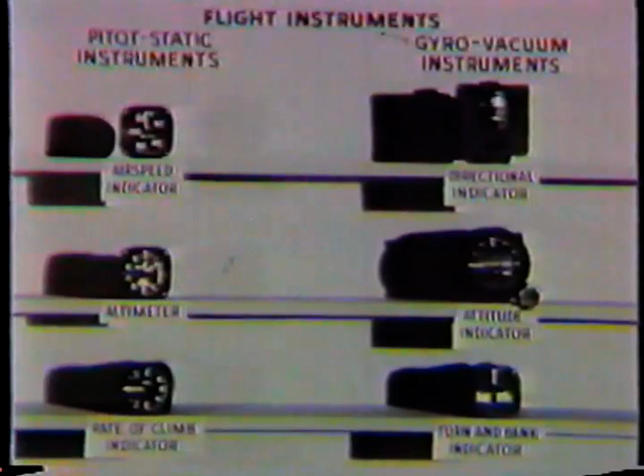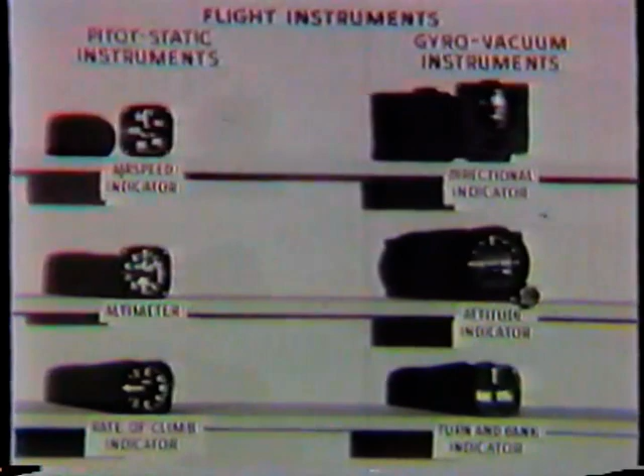These 6 instruments are the ones normally found in Army aircraft. They're used in fixed-wing aircraft as well as many helicopters. The 6 instruments are divided into 2 groups: the pitot-static instruments and the gyro-vacuum instruments. These 2 names, as we shall see, come from the method of operation of the instruments.

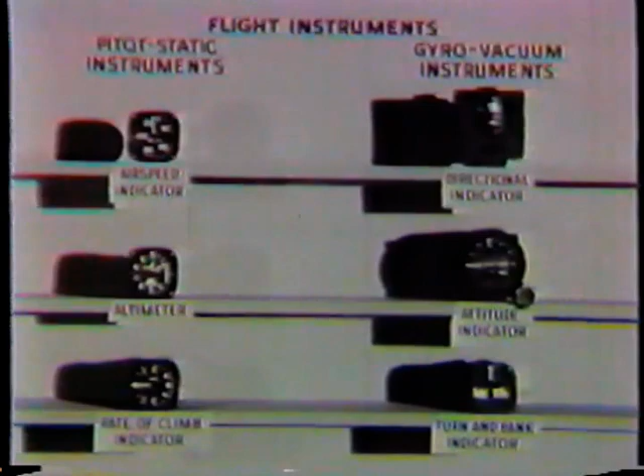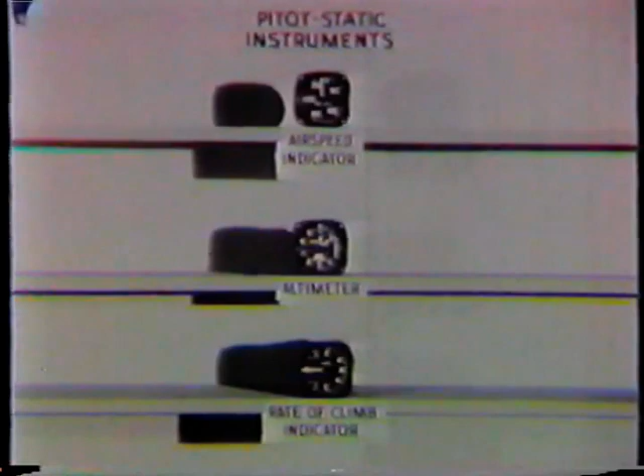The pitot-static instruments are air-operated. 2 kinds of air pressure are required: pitot pressure and static pressure. What is pitot pressure? How is it obtained? Pitot pressure is obtained from a pitot tube, a simple device named for its inventor, Henri Pitot, a Frenchman.

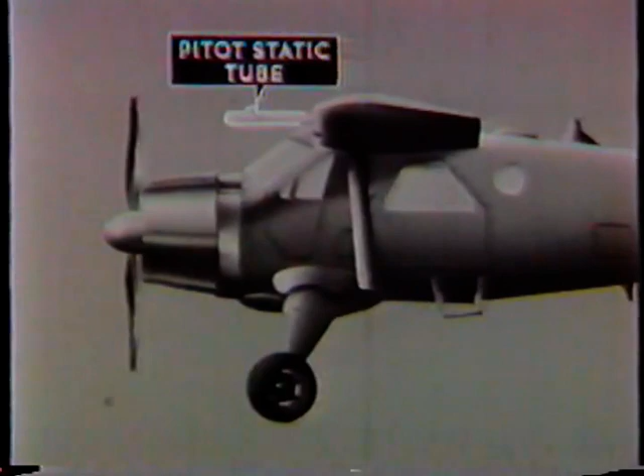The pitot-static tube is usually located in the leading edge of the left wing. The pitot tube is pointed in the direction of flight. It collects the air, which is rammed into this opening at the nose of the tube. The amount of air rammed in depends on how fast the aircraft is moving. To give a true reading, the pitot-static tube must always be located where the flow of air is least disturbed.

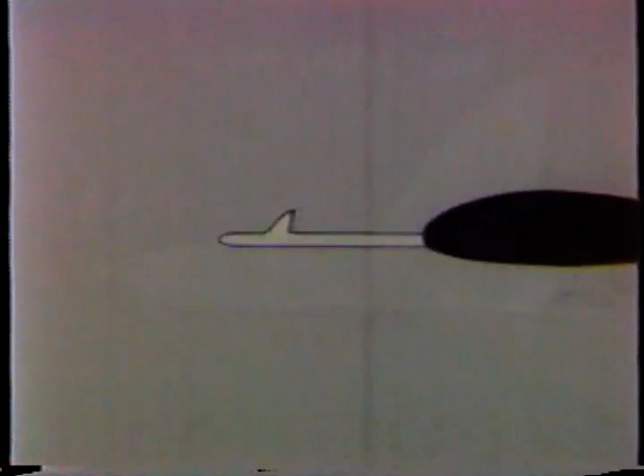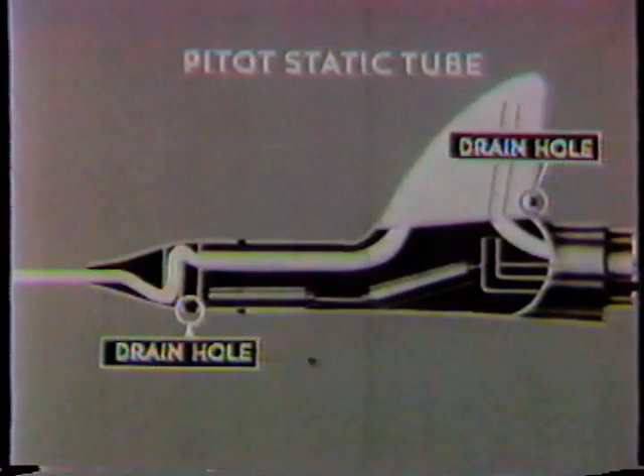Let's take a closer look at the pitot-static tube and see how it operates. Inside the pitot tube, there are baffles in the air passage. They break up the flow of air and help extract dirt and moisture from it. The dirt and moisture are drained from the tube through drain holes. To prevent the moisture from freezing and blocking the tube, heaters are provided. They're controlled by a switch in the cockpit.

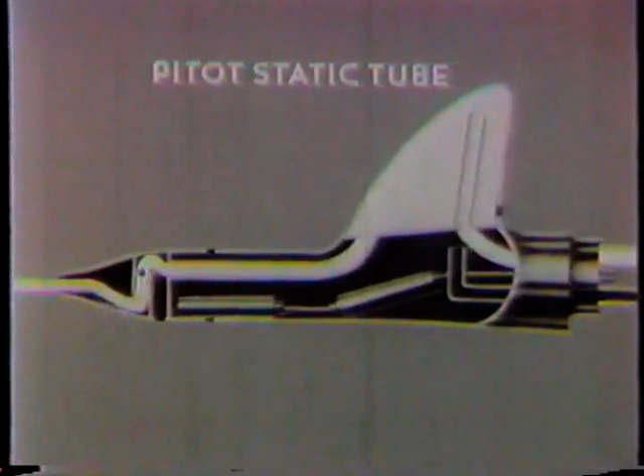From the pitot-static tube, the air is carried through metal tubing to the airspeed indicator. So far, we've learned that pitot pressure is ram air, or air under pressure, corresponding to the speed of the aircraft moving through the air.

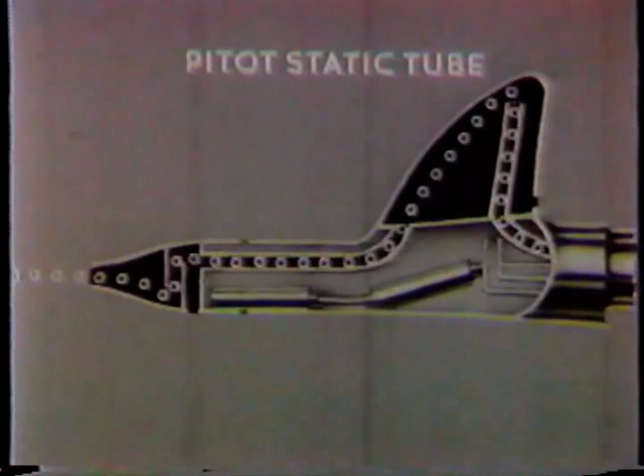What is static pressure? How is it obtained? Static pressure enters the tube through holes in the top and bottom. Since the static holes are at right angles to airflow, air is not forced or rammed in. Static pressure is ordinary atmospheric air pressure. It does not vary with the speed of the aircraft.

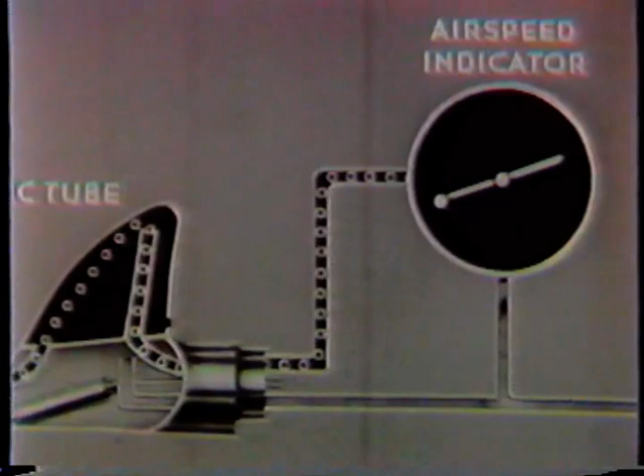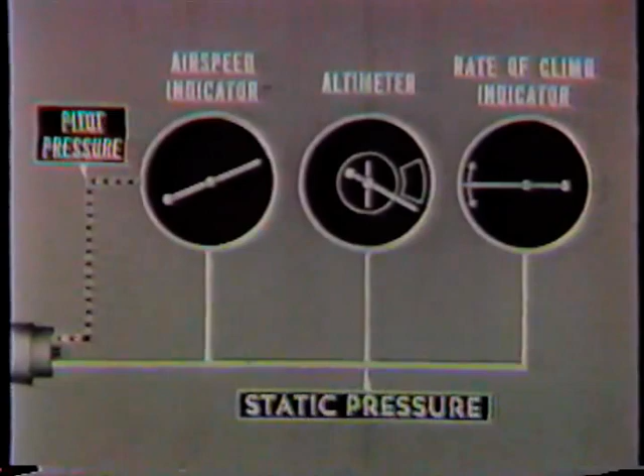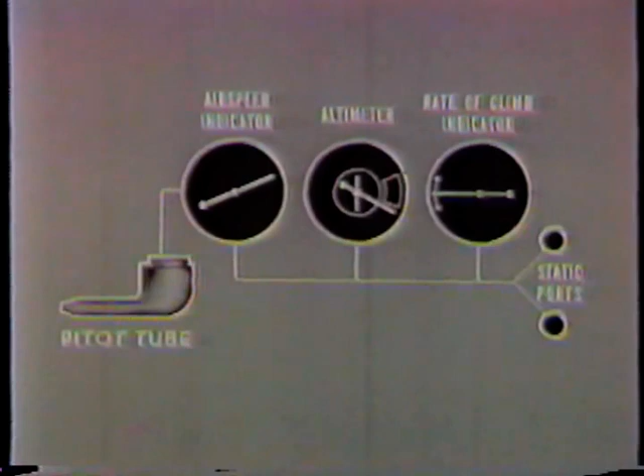As we know, pitot pressure is used only in the airspeed indicator. But static pressure is used in all 3 of the pitot-static instruments. There is another means of obtaining static pressure, which is commonly used on Army aircraft. A pitot tube, rather than a combination pitot-static tube, is used. Static pressure for the instruments is obtained through tubing running to static ports on the fuselage of the aircraft.

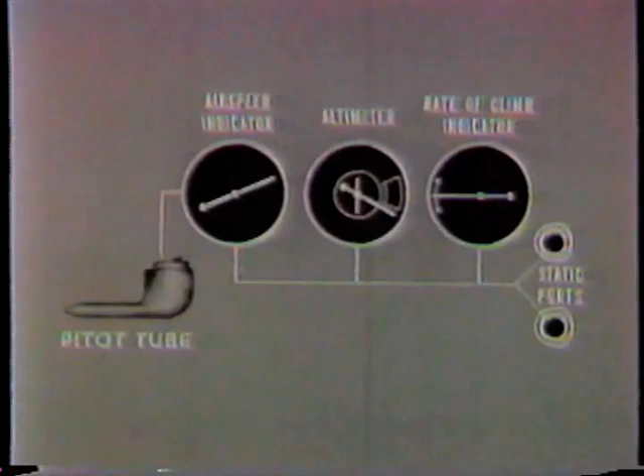On the actual aircraft, the static ports are located where air will not be forced into them. A grid with small holes covers the port to help prevent small objects like bugs or dirt from entering. Be careful not to plug these holes when you're cleaning or waxing an aircraft.

Now we know that pitot pressure is air forced into the system by movement of the aircraft through the air, and static pressure is air at atmospheric pressure. Later we'll see that atmospheric or static pressure also varies during the course of a flight.

There are 3 pitot-static instruments commonly used in Army aircraft. First, we will examine the airspeed indicator and learn about its working principle. The airspeed indicator is housed in an airtight case.

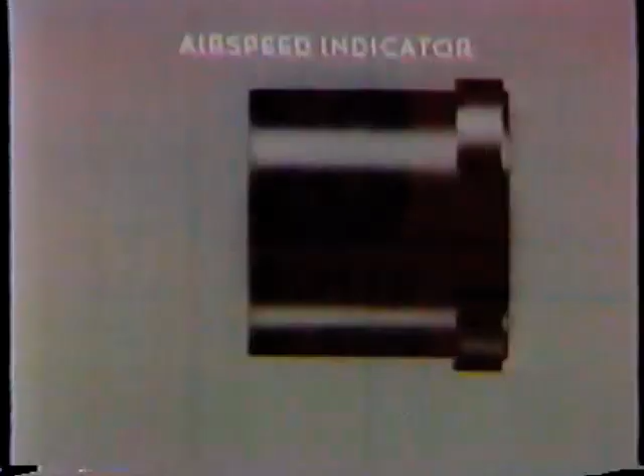As we learned earlier, both pitot and static pressure are used. The static pressure line simply attaches to the case so that the interior of the case is vented to the outside atmosphere. The pitot line enters the case where it terminates in a hollow, flexible diaphragm.

Let's take a closer look at the diaphragm. By cutting away a section, we can see that it is made of 2 thin metal dish shapes joined at their edges.

The corrugations on the walls make the diaphragm quite flexible. As the aircraft moves, pitot air is forced into the diaphragm, causing it to expand in size. As the aircraft increases or decreases its speed, the diaphragm expands or contracts.

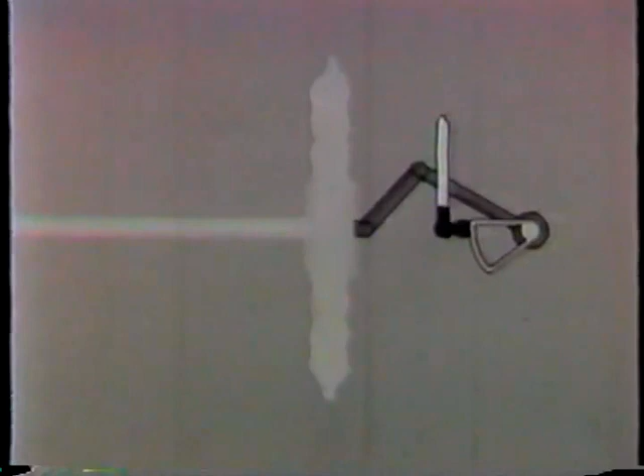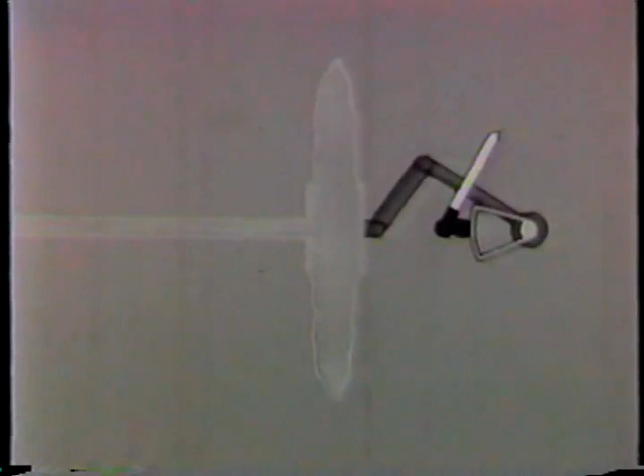This movement is transmitted to a mechanical linkage consisting of gears and levers. Here we see a simplified version of this linkage. When the airspeed is increased, the diaphragm expands, moving the linkage, which in turn moves the pointer to indicate the increase in airspeed. As it contracts, a lower speed is indicated.

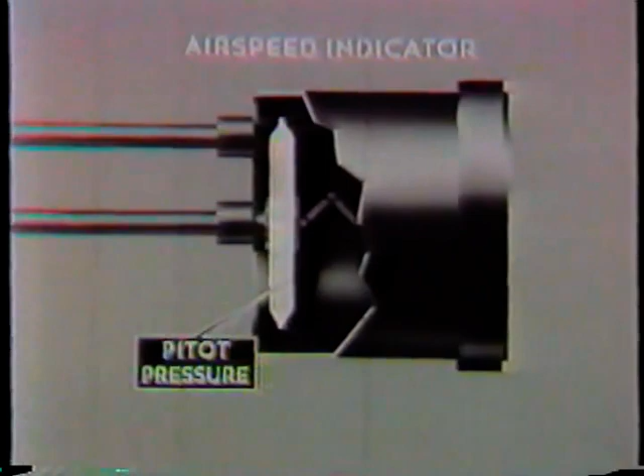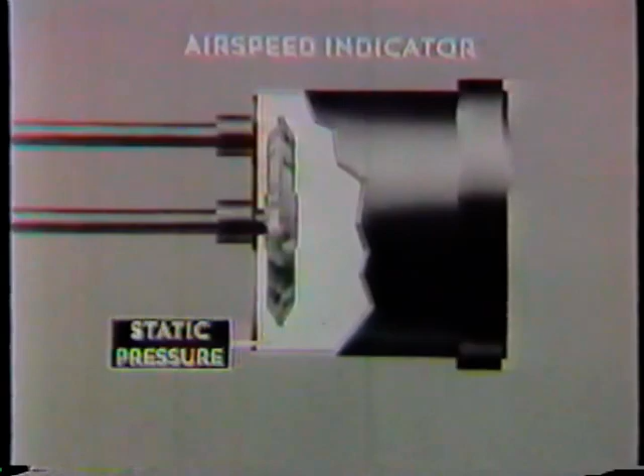Actually, since there is pitot pressure in the diaphragm and static pressure in the sealed case, we can say that airspeed is measured by comparing the difference between pitot pressure and static pressure. The airspeed indicator uses both pitot and static pressure.

But the altimeter and rate of climb indicator use only static pressure. Before we can study the working principles of these instruments, we must know why static pressure varies during the course of a flight.

First, let's clear up our terms. Static pressure is the same as atmospheric pressure or barometric pressure. All 3 mean the same thing, the pressure exerted by the air making up the Earth's atmosphere. Why does air exert pressure? The answer is simple. Air has weight.

Supposing that the Earth at sea level is divided into many square inches. Let us take one of these square inches as an example. Resting upon this square inch, imagine 1 cubic inch of air which weighs very little. But take a column of air extending upward to the limits of our atmosphere. This column exerts a pressure of 14.7 pounds. This is what is meant by the statement, standard atmospheric pressure is 14.7 pounds per square inch at sea level.

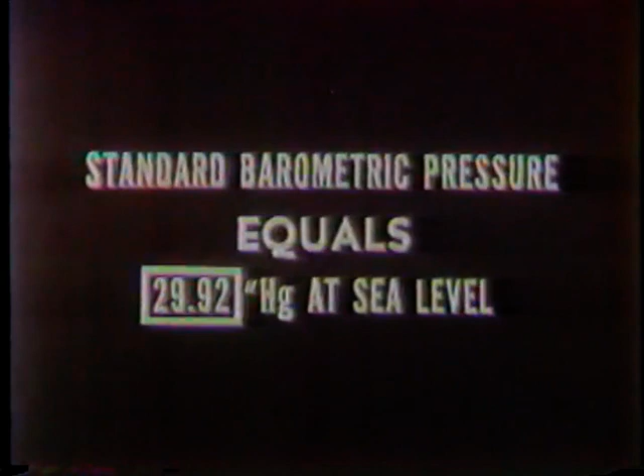Therefore, atmospheric pressure decreases the higher you go. You may also refer to static pressure like this. Standard barometric pressure is 29.92 inches of mercury at sea level. Hg is the chemical symbol for mercury. When atmospheric pressure is stated in inches of mercury, the reading is always a barometric measurement. The reason for using the term inches of mercury is because the first barometer invented used mercury as an indicator.

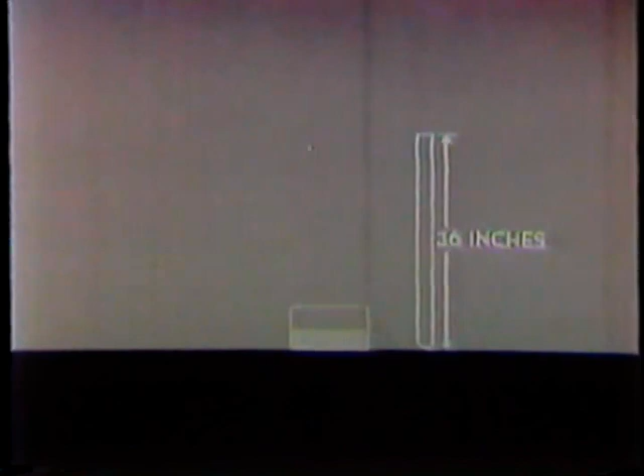Here is a simple explanation of how this barometer operates. A glass tube, 36 inches long, open at one end and sealed on the other, is filled with mercury. This is inverted and placed in a partially filled beaker, also containing mercury. The mercury in the tube will flow into the beaker until the amount of mercury remaining in the tube exerts a pressure at the bottom of the tube equivalent to atmospheric pressure, or 14.7 pounds per square inch.

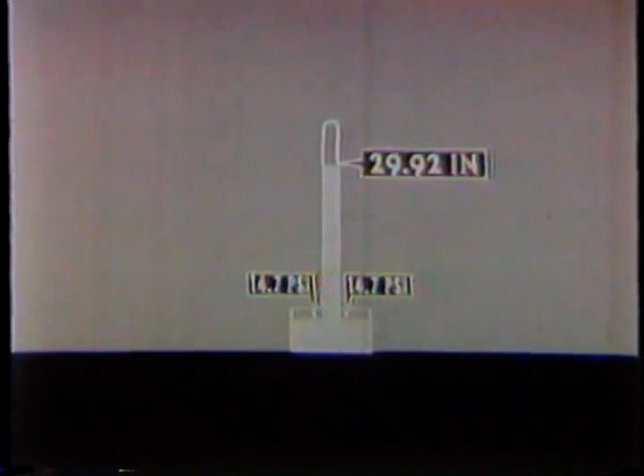If we now measure the mercury remaining in the tube, it would be 29.92 inches. This is what is meant by the term inches of mercury, and we can see that 29.92 inches of mercury is the same thing as 14.7 psi.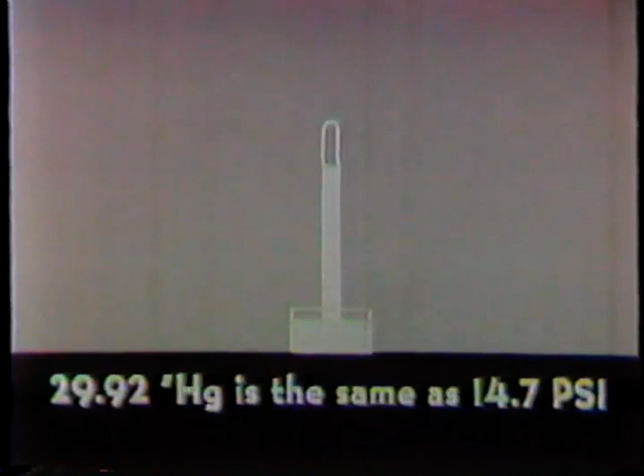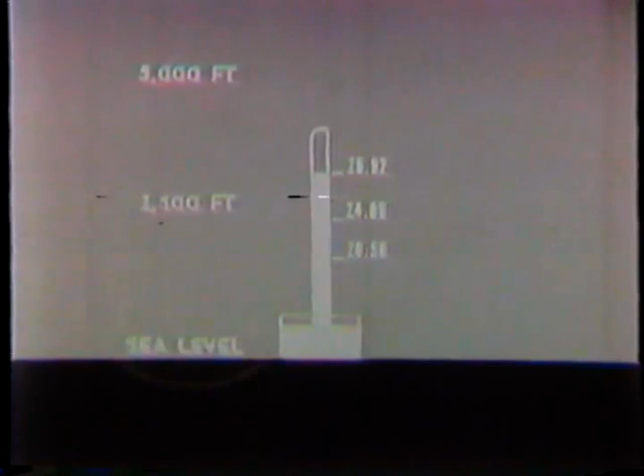Now let us demonstrate why static pressure changes during a flight. Here is our barometer, reading 29.92 inches at sea level. As the barometer ascends to a higher altitude, the mercury falls in the tube. Why? The atmospheric pressure has decreased above the barometer to support the mercury in the tube.

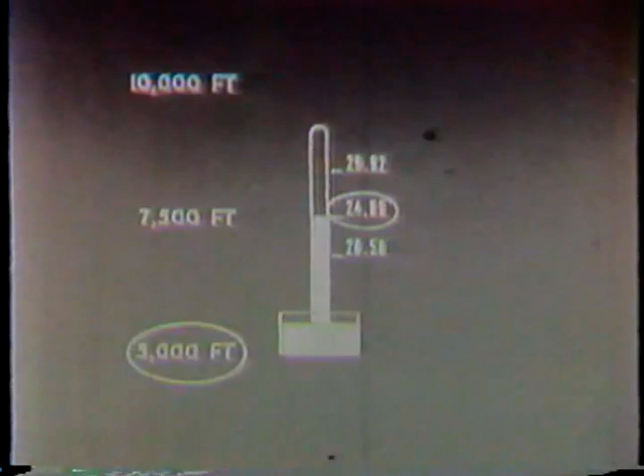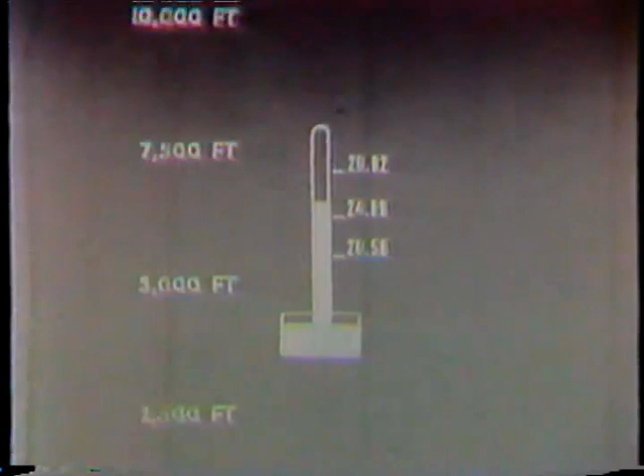As the barometer descends to a lower altitude, more air presses down and the mercury rises. As the barometer ascends to a higher altitude, less air presses down and the mercury falls. The mercury barometer is still used. However, there is another type which is much more compact, the aneroid barometer.

This is the heart of this modern barometer, a special flexible diaphragm called an aneroid. It is similar to the flexible diaphragm, but has no tubing connected to it. When manufactured, the aneroid is sealed with air at a pressure of 29.92 inches of mercury, standard sea level pressure.

Notice that at sea level, the walls are flat. However, if the aneroid ascends to a higher altitude, its walls expand. This happens because there is sea level pressure inside the aneroid and less than sea level pressure outside it. At lower altitudes, the aneroid contracts. At higher altitudes, it expands.

In an aneroid barometer, this contracting and expanding operates a pointer on a dial. The dial reads in inches of mercury. If we change the numbers on the dial to feet of altitude, we have an altimeter.

Aircraft altimeters contain aneroids and are exactly the same in working principle as aneroid barometers, with one exception. On the altimeter, there are 3 dial pointers. The short pointer indicates tens of thousands of feet, the medium pointer indicates thousands of feet, and the long pointer indicates hundreds of feet. For example, this altimeter reads 130 feet.

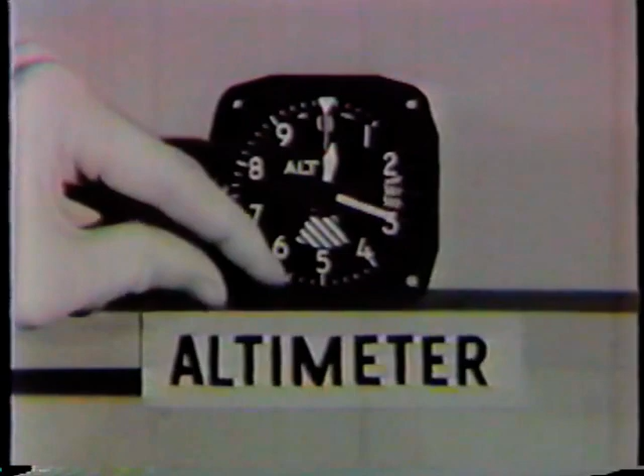To adjust the altimeter, first call the tower and obtain the current barometric reading. This setting changes from hour to hour as weather conditions change. Turn the setting knob until the current reading appears in the opening. At the same time, the dial pointers will move, in this case to read 420 feet.

An accurate altimeter will show the actual altitude of your location. Airfield altitude is always prominently displayed on every airfield.

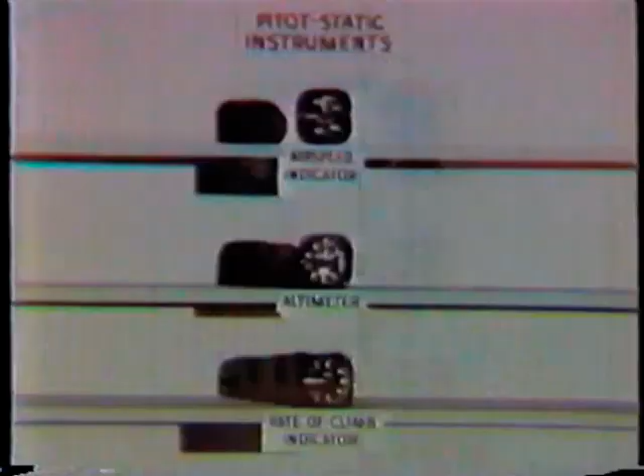Now we will move on to the third pitot static instrument, the rate of climb indicator. This instrument is also called the vertical velocity indicator. This name is more accurate because the instrument does measure the rate or velocity of vertical movement, both climbs and descents, but we'll use the more common name, the rate of climb indicator.

This instrument is calibrated in feet per minute. When the pointer moves down, the aviator knows he's descending, and he can tell how many feet he's descending each minute. The pointer also indicates climbing and shows the rate of climb in feet per minute.

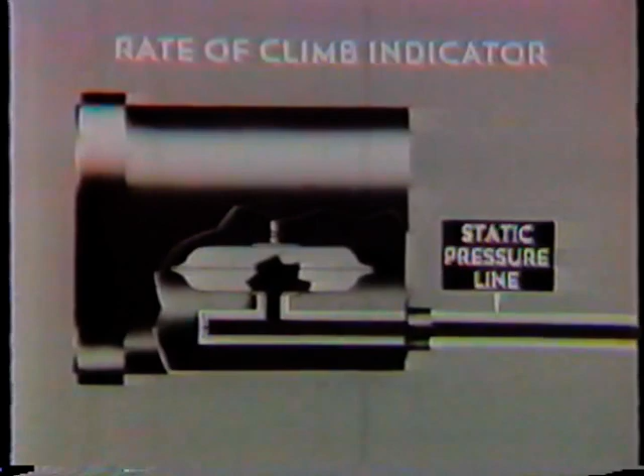The working principle is quite simple. A static pressure line is connected to a case that is completely airtight. Connected to this line is a sealed, flexible diaphragm. At the end of the static pressure line is a calibrated leak. This leak is merely a tiny hole drilled to a very precise size.

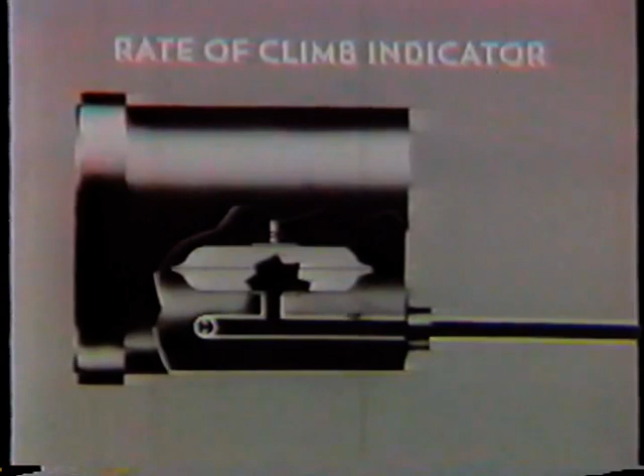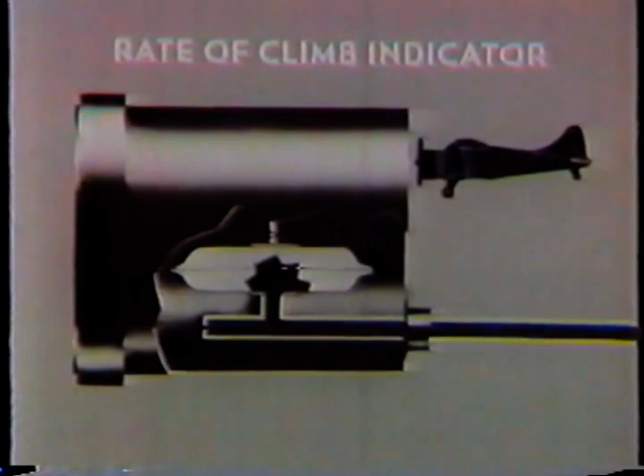Here's how the mechanism works. When the aircraft is in level flight, the pressure in the diaphragm and in the case are equal. As the aircraft descends and encounters air of higher atmospheric pressure, static pressure increases and rushes freely into the diaphragm. It also enters the case slowly through the calibrated leak. Since there is more pressure in the diaphragm than in the case, the flexible diaphragm expands. This movement is carried by mechanical linkage to the pointer, which indicates the rate of descent.

As the aircraft levels off, air continues to bleed into the case through the calibrated leak. It takes several seconds for case pressure and diaphragm pressure to equalize so that the diaphragm returns to normal. The pointer returns to zero after this normal built-in time lag.

The opposite action occurs when the aircraft climbs and atmospheric pressure decreases. Air pressure rushes freely out of the diaphragm, but the calibrated leak slows the escape of air from the case. There is more pressure in the case than in the diaphragm, and the diaphragm contracts. The mechanical linkage moves the pointer to show the rate of climb.

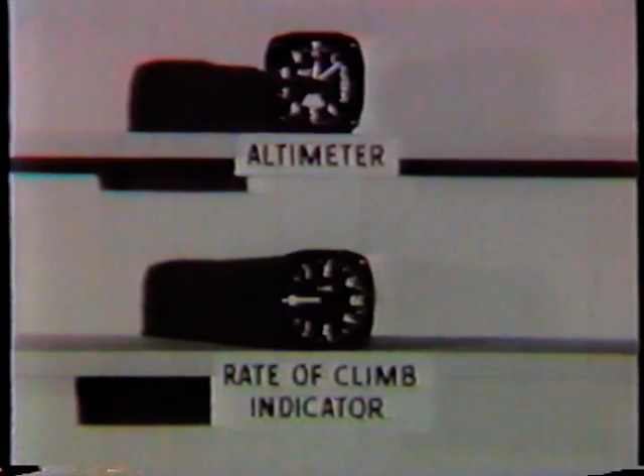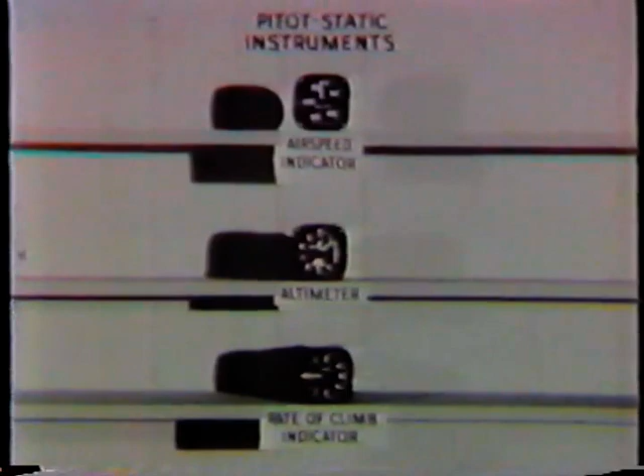The altimeter measures the atmospheric pressure as the aneroid containing sea level pressure contracts or expands, and the airspeed indicator measures the pressure of impact air flowing into the pitot tube to indicate airspeed. These are the three pitot static instruments commonly used in Army aircraft.

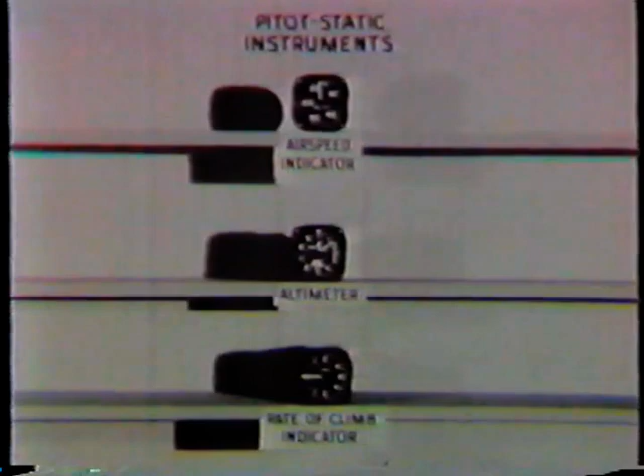Now we will turn to the three gyro vacuum instruments, first determining the meaning of gyro vacuum. A gyroscope, or gyro, is essentially a perfectly balanced wheel on a double-ended axle. The wheel and axle are supported by two rings which are joined together and mounted in another ring.

Here is how it works. When the wheel spins, the gyro becomes rigid. By rigid we mean when the outer ring is moved, the gyro does not move. Its high rate of rotation causes it to remain fixed in its original position.

This gyroscopic rigidity is used in all three of the gyro vacuum instruments. We shall learn why they are called gyro vacuum instruments as we study the working principle of the directional indicator. The directional indicator is not a compass.